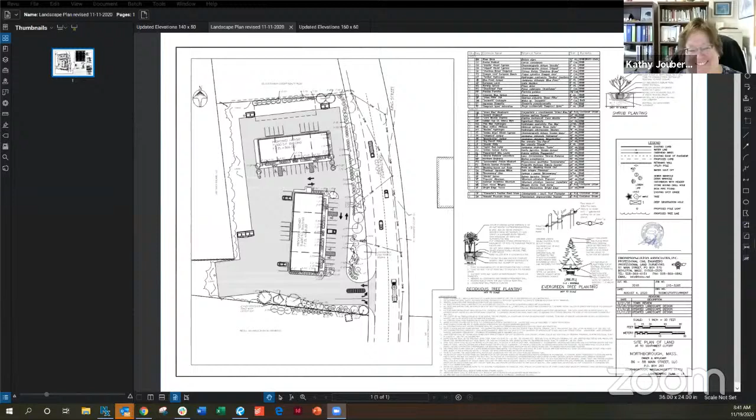Can you see? Yeah, yep, that's the one, 11/11/20. And as I say, the primary change, as you notice, we're off the curb between the 9,600 square foot building and Route 20. Before, you had about 4 to 5 feet off, you had that fence. Now you see, you don't see that fence there.

Well, I think the improvements are fine. I still have Dave Veron's concern about the planting around the building and in the parking lot and how well they will hold up over time. But as far as the buffer plantings on the perimeter and single fence on the south border, elimination along Route 20, I think those are acceptable.

Thanks, Tom. Dave? I feel the same way. Again, going around the building, I believe with the fire code you've got to be with stone around the building, so again I have my same concern with the plants because they're going to get pretty hot, pretty fast. But I think it's a huge improvement and looks pretty good.

So you're recommending we put that notation in our letter to the ZBA that there should be stone around the building, or? I think that's fire code. I think it's only if the building's combustible siding, Dave. Okay, so it's not required on this one? Correct.

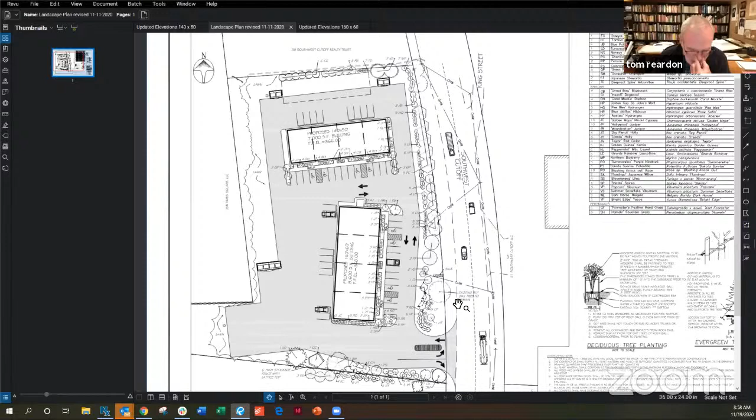Right, so you'll see the upper 15 feet of the buildings. Correct. One of the reasons why I asked the question is when you drive down that whole area, all those land areas have that pretty high berm, so you don't notice it because it's all equal as you're driving by. My concern was that you're going to take it down and then put trees and vegetation up, which in my experience does start to die and show through. So it's nicer to leave the existing berm and add to that your plants, but at least you know there's going to be a certain amount of shielding from the visual when it is like that.

So like I say, trees and everything else don't last forever. I know this is going to be put in perpetuity, but it needs to be blending with the other lots, I would think, instead of really cutting it out and making it look like its own industrial piece. There's a fill where the existing driveway is.

Say again? We're filling where the existing driveway is into Del Greco's. So you'd bring that up in the same level as the rest of the berm. James would have to talk on that.

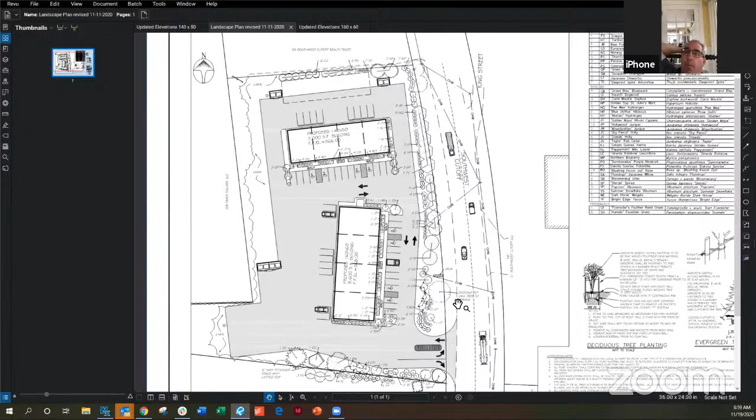Yeah, but yes, if we went to the site plans on the screen, and specifically the grading plan, we could see if I can find it. We could discuss exactly what the different grades are. Honestly, Lisa, the real intention here is just to change that slope off the Route 20 curb from a slope that was going to be hard to keep mowing and maintaining well, to a 3-to-1, but the grades once you get into the site aren't very different.

The other thing is that right now, if you drive along there, the slope off the curb is much more pronounced a few lots to the south, in front of the Del Greco lot immediately to the south, and the next lots south from that. If you drive along right now, and we're looking into the site, you can see it's not such a big slope as in front of the properties to the south.

Not sure I'm finding it. I have the one where you added the dumpsters. If I could share, I could show. Okay, I stopped sharing.

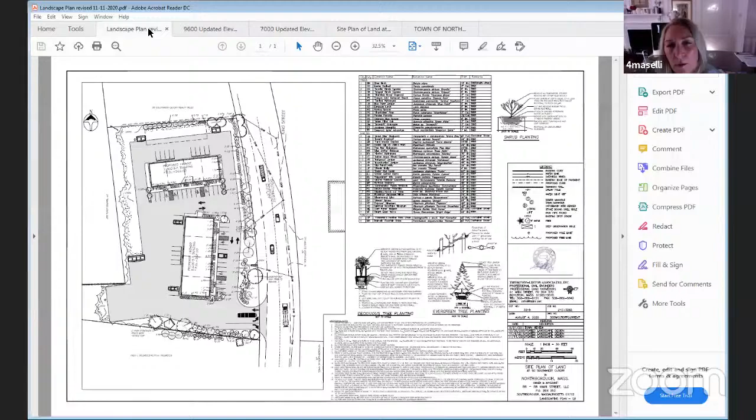And then the next question is, because we're taking away the fencing that was there, are the dumpsters, certainly the one to the east of the second building, going to go? Well, I think the dumpsters are supposed to be enclosed in fencing, aren't they? They are, and I'm going to zero in just a little bit further.

For instance, right where I've got the cursor, you've got the 2 dumpsters, and what's shown around them is fencing, and this is a gate at the access end. So yeah, they are all shown as having fencing around them, gates in front at the access end. Great, I'm glad. All right.

Thank you. So then the next question I have, and I don't know if it's part of the landscaping, the area between the 2 dumpsters to the north, that area right in there, I think you had as a recharge area or something. There was something underneath that.

Yep, that's infiltration. Okay, what will happen, because the side-facing building, when they go to do their outside storage, as you said, they'll have the ability to store materials outside. So how will that be shielded from the road when the building is on this side and not straight in front, or at a perpendicular and not parallel?

Well, for one thing, this was the area where it was a little more elevation difference. Again, you've got the tree and shrub plantings here. I guess I'm hoping that would be sufficient. If more is needed, we could certainly discuss.

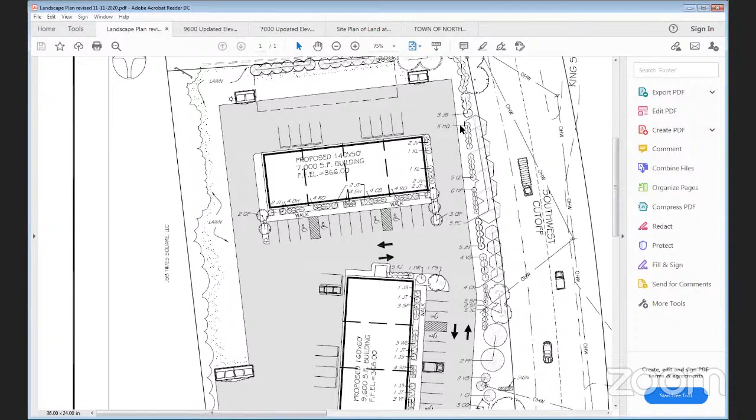Well, would you want to have some fence returned, put back in this area where I'm pointing? Well, this is what would... Yeah, I think at the very least, more of a stockade, not residential looking, but a stockade, so that you can't see that sort of thing, because I've seen them at different warehouses and they just start stacking things up because that's the nature of the business. But because you don't have that building hiding it anymore, you have to consider that area.

Okay, I don't understand. This is the third time talking about this plan and now all of a sudden this is an issue?

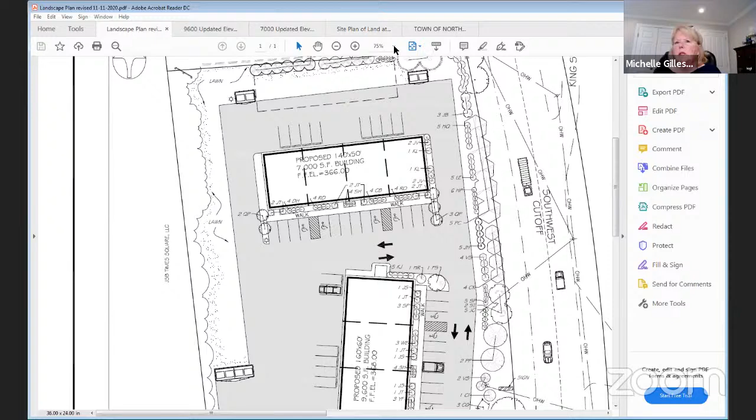So the only thing I would say is if we look probably just 2 or 3 parcels down the road, you have Ace Hardware that uses a ton of their side of the building for materials that are outside, anywhere from landscaping to soil to propane to... Again, we don't really know who the applicants are going to be, but you do have a certain higher level elevation, you've got a dumpster, you've got parking spaces.

I guess, are you concerned about the area further back towards the back between the 2 dumpsters, that somewhere back there someone might put some wood and you're going to see it and that would be a problem? No, I don't think you could be as specific as knowing where they're going to put it. If you have 4 clients in the smaller building, each one can have whatever product they need to put outside.

In the case of Mo's, he stacks his tires out there. In landscaping, they may stack blocks of stones that are on pallets. There's things that go out there. Ace isn't a very good example because Ace is set back, and part of their product is selling those items. It's not storage, they're selling the plants and everything.

So when you get into it, what we're doing is shoehorning an industrial use into a residential commercial area, and it has to look more residential commercial in my estimation. So that's what my concerns are, that once this is put in, 2 or 3 or 4 years later it's not going to look as pretty as it does right now.

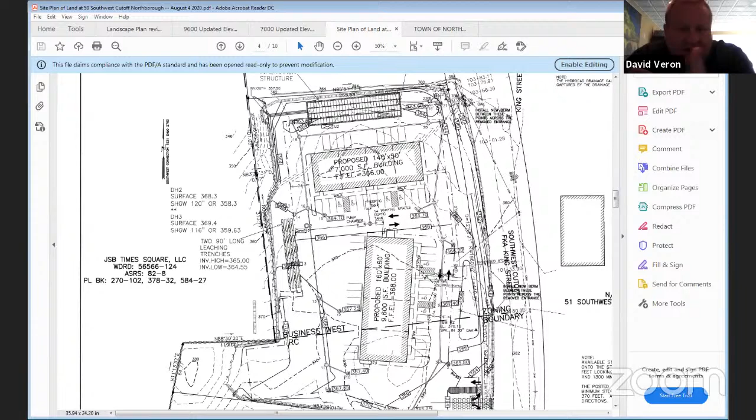I don't have the breakdown of the plants because I'm in my office, not my home office, and I moved everything over there for this plan. But when it comes to the plants on the right-hand side, I believe those are two existing trees that are on the plan. Is that correct? That's correct. And if we try to put anything larger in there for evergreens, you're going to have competition and it's not going to work. I remember what was in there, it's a good mix right now, and I think it should be left alone.

And I think if you start putting a stockade fence into that, you've got too much going on there, and something's going to give one way or another. I think I see everybody's point, but at the same time, the way it is right now is probably the best solution. Otherwise, in a couple of years you get addition via subtraction, where you have too much going on in such a small space. Something has to give - is it the oak trees, the evergreen, or the fence? Because something is going to have to give, and I would expect the oak trees to go.

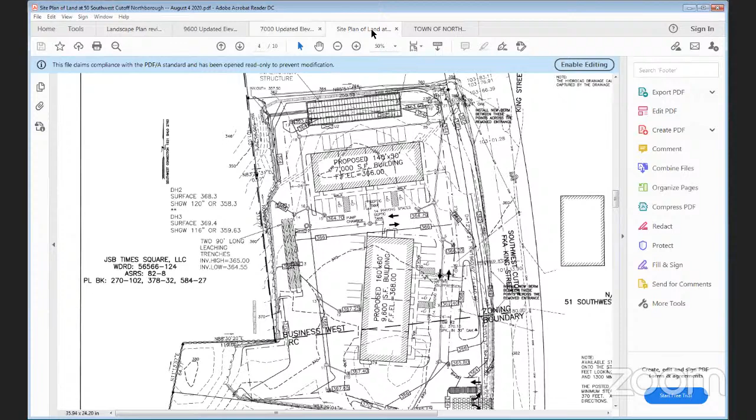Michelle, I would just add to Tom's point - what would seem most objectionable would be materials easily visible from the street if they had an objectionable appearance. But this aisle has to be maintained open for vehicle passage, the area here for access to the dumpsters, and you've got to allow access for the overhead door to this unit. So it's actually pretty hard to store anything in this area. Once you get further over here, you're more distant from the road and tougher to see - you're down here at around 358, and this is 364 base, probably 150 feet away. So visibility will be somewhat limited, and as Tom suggested, maintaining access to these points would prevent storing materials in the most visible area. The area where it's easier to store materials is back here, but that's shielded from view by the larger building.

James, can I ask you a question about storage of equipment and vehicles? Sure, that may be a question for Nick and Tim, but yep.

You wouldn't want them parking large pieces of equipment on your retention area or your septic system, correct? That's correct. So those areas, we're not going to see lots of earth movers and backhoes and stuff like that you could see from the road. Well, I'd have to backtrack a little - we wouldn't want it over the septic system specifically, but the chambers in the ground at the infiltration system can stand up to some heavy loading.

So then they'd be off paved surfaces. Then they'd be into - yes - so you're going to start destroying your landscaping by putting vehicles off the paved area. Well, if we imagine a vehicle parked here on the lawn for whatever reason, he's also shielded from view in part by the landscaping and the fencing around the dumpsters too. Yeah, it's tough to stockpile materials that are going to be in a right of way or a fire lane. Right, I'm not so concerned about that. I think the nature of these contractors is going to be indoor storage of their vehicles and materials.

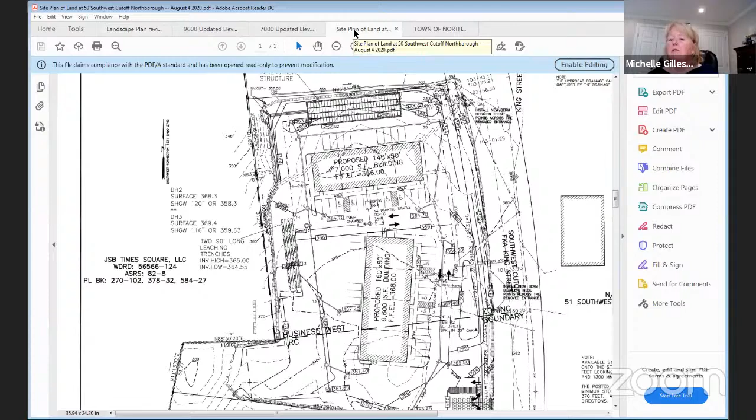If you could just talk one time, because Lisa had some concerns about signage and about the lighting plan, let's quickly go to the lighting plan. Could you briefly, James or Nick, talk about it? When the planning board met this week, we hadn't seen a lighting plan, but you're going to present it to the ZBA, since when you met with us way back, you didn't have one. So I know you'll be presenting that as part of your package. If you could just show it now to Lisa, who had some concerns, and for the sake of time, we'll try to keep that to 2 to 3 minutes so we can be productive in our last few minutes.

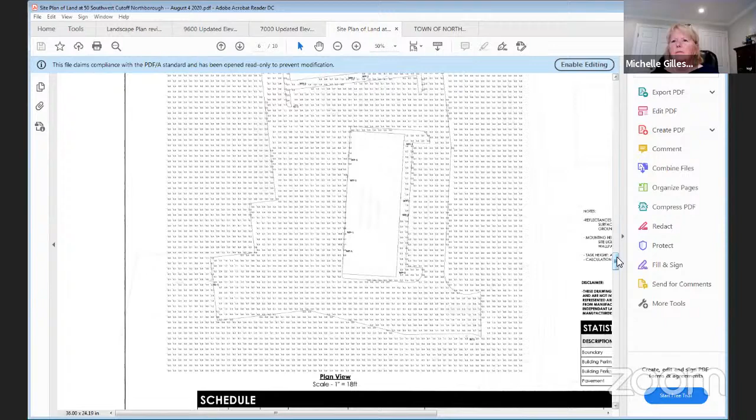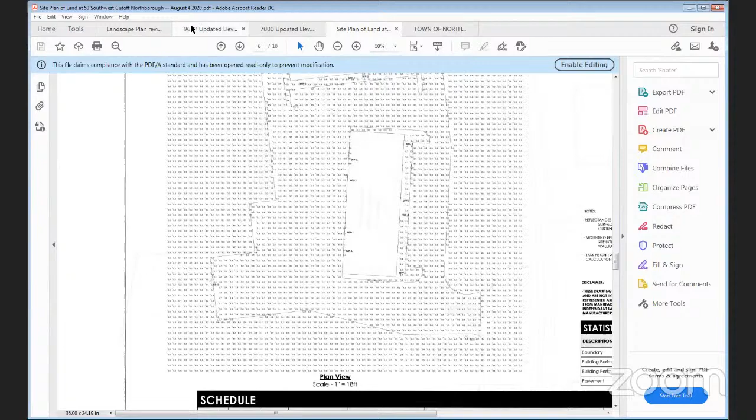I'll be very quick. What you have on the screen is the photometric plan, which showed the results of the wall pack lights on the building and 4 lights. I'll jump back to the landscaping plan. We wanted 4 lights: one by the entrance, one at the back of the pavement, one lighting the area between the two buildings, and another at the back corner. In addition, you'd have a wall pack light by each door, back and front. That's the proposed lighting. The photometric plan, which I won't go back to, is a little hard to look at, but it shows there wasn't going to be excessive spillover to adjacent properties.

Okay, thank you. Lisa, do you have any questions about this? Well, I see the spots where they are. What's the, I mean, I don't know if maybe there's a plan I haven't seen. How does it fan out? How high are they? And what lights are they using? I hope I get this right, I believe they were 14 foot, and I don't have the wattage, but it was on the lighting plan included in the site plans.

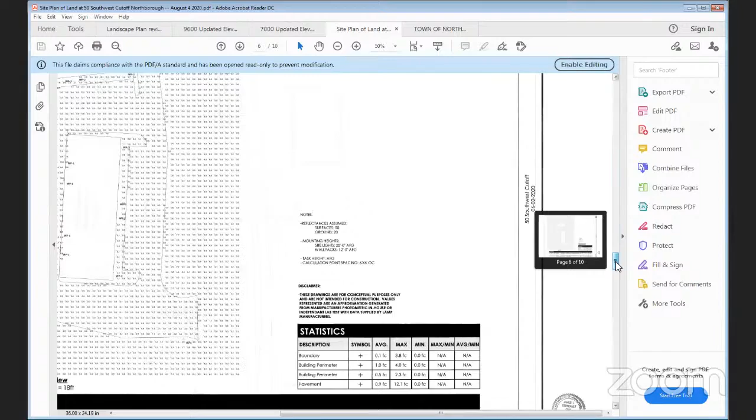Okay, here it is. Oh, excuse me, 20 foot. They're 20 foot, down-facing, on the 4 poles. Yeah, sorry, all right.

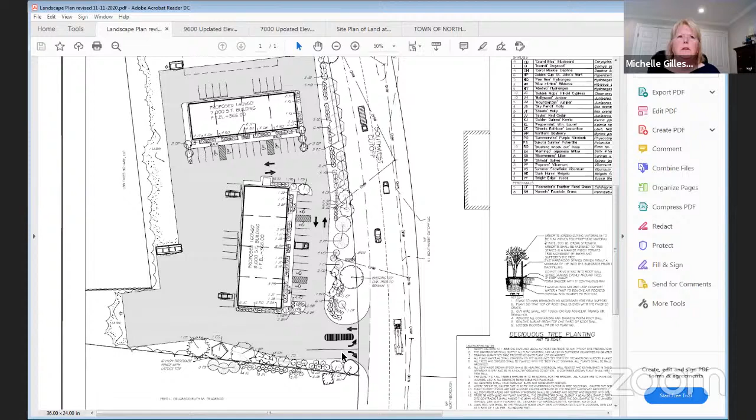Well, if they're going to do it at ZBA, they can finish with it. Or, I mean, I didn't see how the spread would go, or how high they were, or what they looked like, so I thought I'd like to have seen that in the plans, but perhaps I missed it. Do we know the poles are 20 foot and the wall mounted ones are, did you say 12 foot? When I looked back at the other one, everyone's required to do that, so you can see.

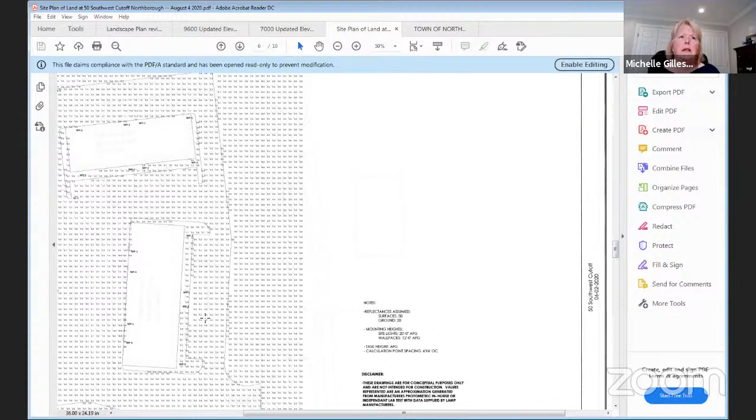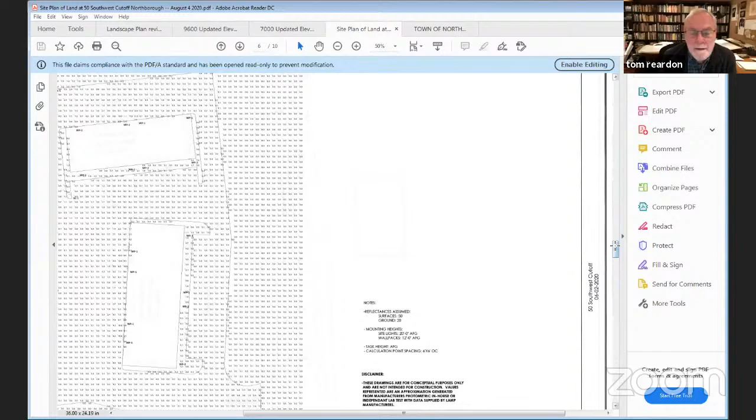Right here, the mounting heights for the site lights are 20 feet, the wall packs are 12 feet. Everyone does this illumination plan, which is standard in the industry, and it shows that nothing spills over off the property. The light levels are about 1 foot candle at the pavement — it's not a lot of light here. Yeah, all right, that's fine.

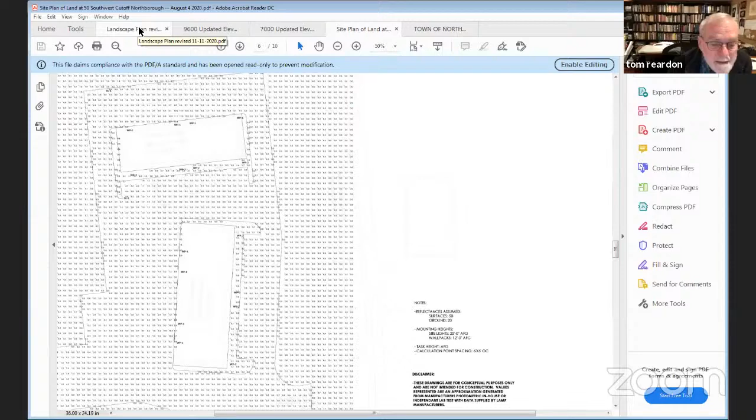I just wanted to get more information. Okay, and then at the doorways, you get 2.5 foot candles — that's less light than you have at your front door. I can resend all this information, I mean you all have it, and you have the cut sheets for what the lights were going to look like, so I can just resend that email. I mean, it doesn't help you right now, but I thought you'd put the lights to bed a couple meetings ago.

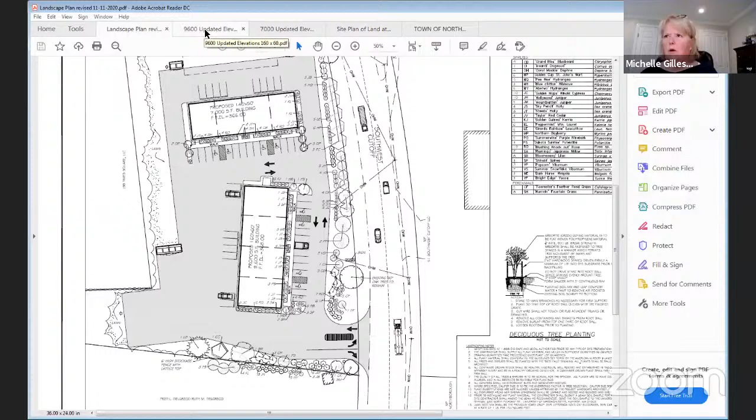So just to go through our checklist, today's meeting was to review all the landscape changes, and we did have a long discussion about that. The board has gone through and reviewed the signage, and unless anyone has a reason they're not going to vote yes.

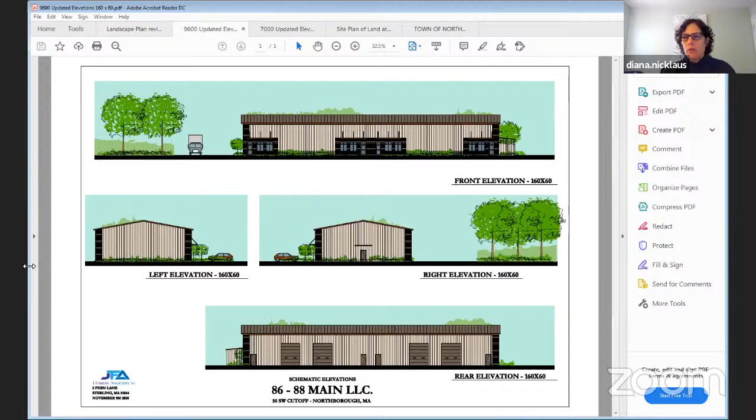We've already checked off signage, site, landscaping, and the lighting plan. They also made changes architecturally that had been recommended. I think they've done what we requested, in particular with the smaller building.

Here's the smaller building, the elevations. By putting all 4 elevations for each building, you can see there's now a vocabulary that's consistent throughout for both buildings. So whether you're driving by or going up onto the site, it now looks all of a piece, with similar treatment on all elevations. I'm certainly in favor of these revisions. I agree.

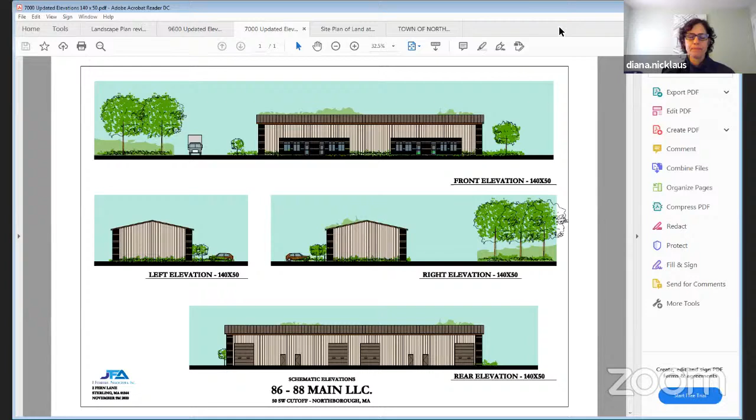So we are now at 9:25. Kathy, what's the next step? We'll have the design review. Do we have to take a formal vote and then send it off? Yep, that's typically what you've done in the past. When the applicant has met all your comments, which I believe this applicant has, you basically say you've worked with the applicant, and the elevations and site plan dated such and such, that you're in approval of. If you still have comments they haven't incorporated, you ask that the ZBA put those in as conditions. But going through my notes, everything I had as a question for the board members to follow up on has been followed up on.

Could I request — today's meeting was to go over the elevations — could they stipulate what kind of fencing is around the dumpsters? We had the shadow box fence proposed, which from any distance is a solid opaque surface. Is it chain link, James, with slats? Yeah, stockade, not just chain link — the slats weaved version. Could you note that on your plan? Yeah, it actually is noted on the details.

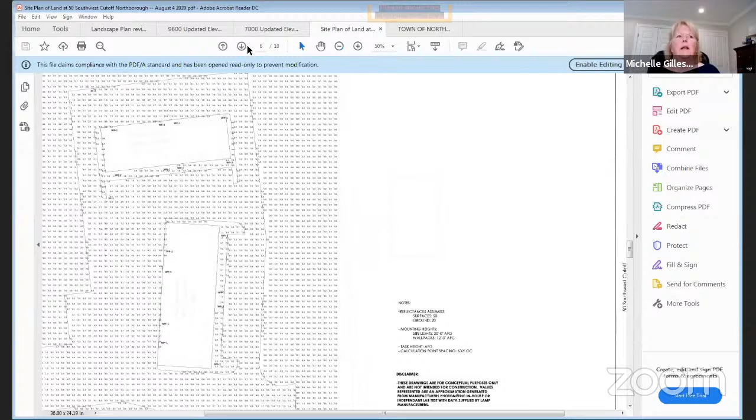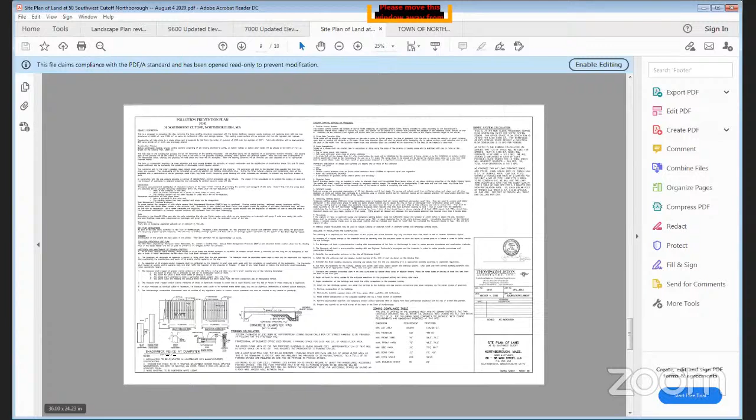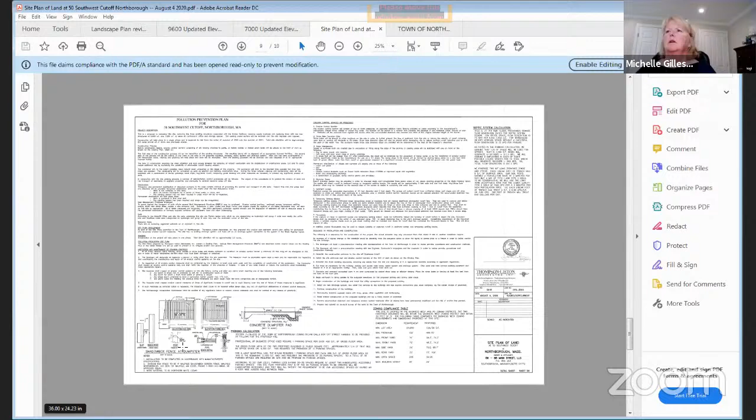Okay, let me just jump in — thank you. So we've reviewed everything, we'll go around and take a vote. When I call out your name, note that the applicant has submitted their plans and answered — shadow box, there we go, okay, and that's on the plan. The applicant has met with us several times, we've worked through the process and answered and addressed all of our requests and concerns made by the board. So now we'll just take a vote.

Dave, are you in favor of the design review plans submitted to us for 50 Southwest Cutoff? Yes. Tom? Approve. Lisa? Nope, I'm not going to approve. Diana? Approved. And myself, approved.

So Kathy, is there anything else you need from us? Nope, I'm all set. I'll just put together a quick memo, a couple of sentences stating the applicant has addressed all of the concerns and that 4 out of 5 members approved the plan.

Thank you. Okay Kathy, since we're coming up on 9:30 and this was scheduled as an hour meeting, do you have anything else for design review to talk about? No, I'll send out — when I get some dates from Judy, I'll send those out to everybody and we can do a doodle poll or I'll just handle it through email.